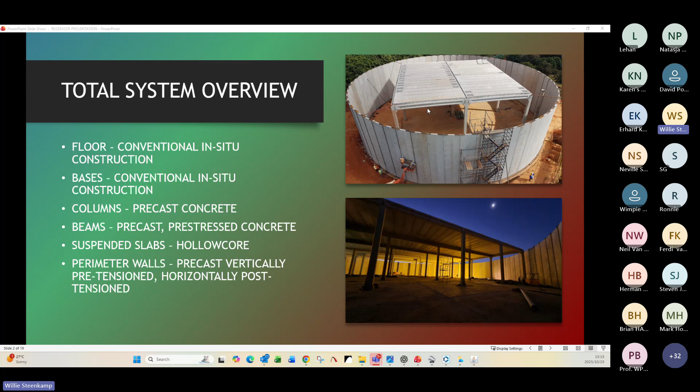Here's a couple of nice pictures just to give you an idea. You can see here at the bottom in situ cast floors, and then these are the precast columns with the corbels supporting the pre-tensioned precast I-beam sections, and the hollow core slabs.

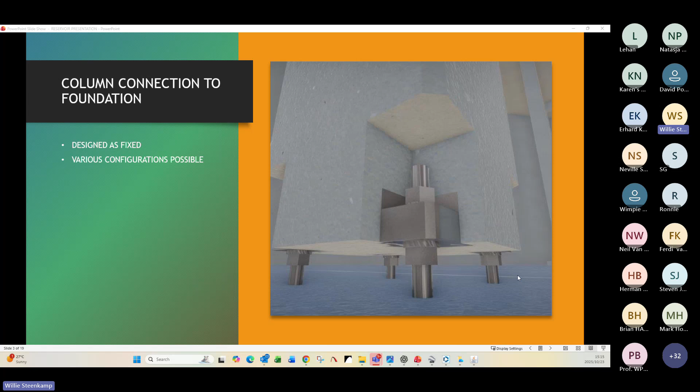Going to the connection details, precast columns to the foundation. So design is fixed, but with that, there's also various configurations possible. These are just a couple of examples that we have here, but it's more project specific depending on a couple of conditions on site. It can be an independent base and floor, where you would have a joint around your base or pad footings.

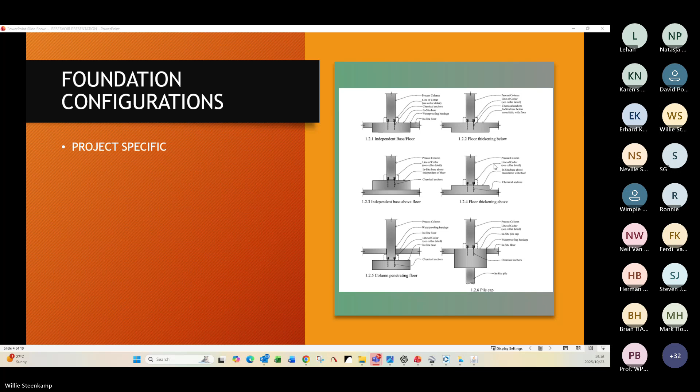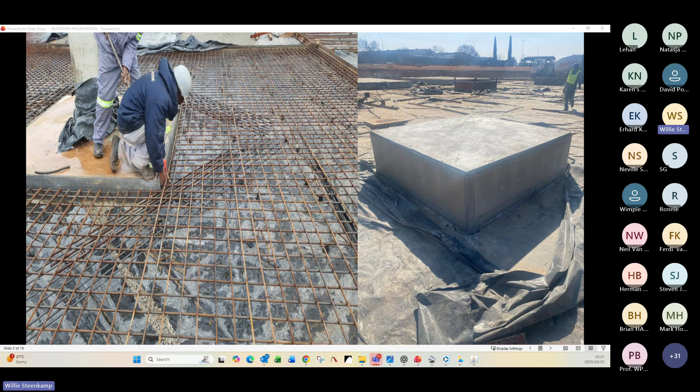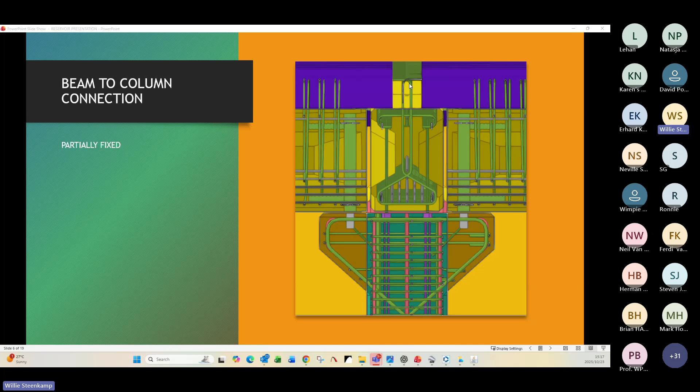Typically, 3 cores were opened off the hollow core slab. It goes about 1.2 to 1.5 meters into the slabs, closed off with some plastic bungs just so the concrete doesn't run into the hollow core slabs. And then everything is stitched together so you have a complete monolithic unit at the top.

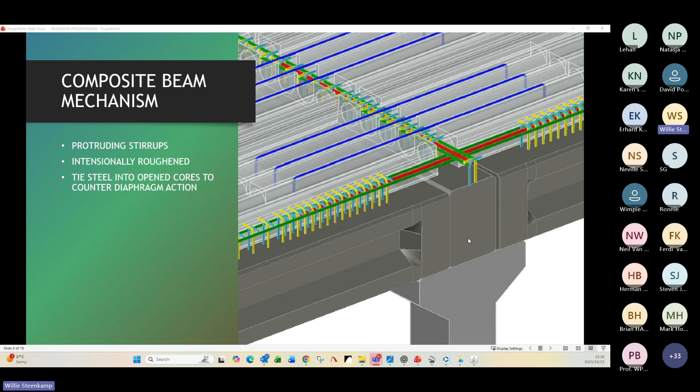Here's a nice picture of what I was describing now. Here you can see the precast beam basically at the bottom with the protruding stirrups. And here's the cores open in the hollow core slabs. This will typically have that tie steel running through these cores. And we also have some longitudinal steel along these beams, just tying everything together.

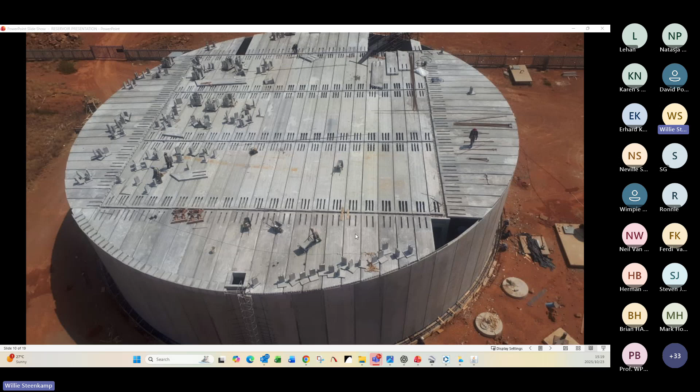Here's basically a view from the top to give you a better idea of how the complete system would look. You can see the lines there where obviously the beams are running. You have your center core portion here in the middle, which gets installed typically first, and the perimeter slabs at the later stage. And you can also see some of the coping details being stacked on the roof,

which then finishes off the edge. It's one of the finished details we do have. We also have another coping system, or another finish. It depends, as I said, on the project specifics, what finish would go there.

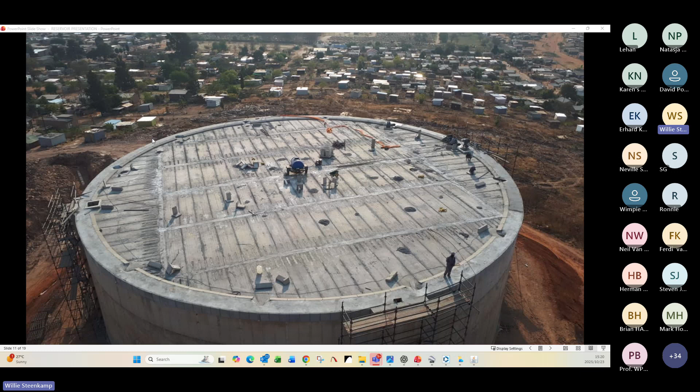Here's now where the stitching concrete is being cast and the slabs are being stitched together with those stirrups from the beams, the protruding stirrups. And you can see also along the edge, everything is now being tied together with a coping detail.

Okay, coming to the precast wall panel connection to the ring footing. You have the protruding stirrups also sticking out from the ring footing that's being cast. First, it's a 2-pour stage system. Lateral reactions are transferred through the kicker, and then the whole system is designed as a slide and a pin design, where it's sliding first stage and then pinned as a final stage when the kickers are cast.

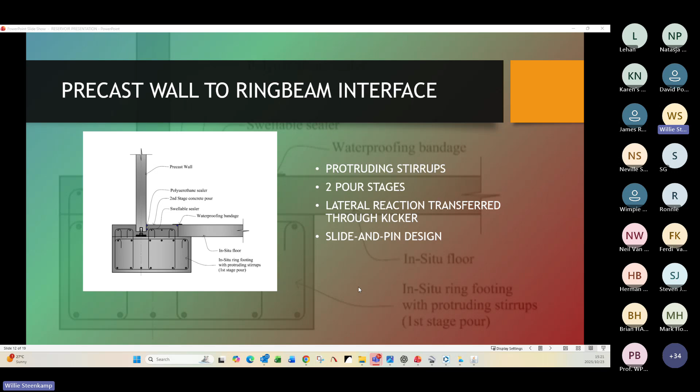Coming to the precast wall panel joint, you can see at the top right hand side a nice picture of the joint after it's been filled. And here at the bottom, it's a plan view, top view, basically of the joint. So the wall panels are connected with this typical grout joint. It's a high viscosity infill grout that gets cast into the panels.

All of the panels, and I'll see if there's a nice picture maybe later on, have between the tubes for the post-tension cables actually flow grout tubes for the grouting process that gets done at the later stage. The grout is poured prior to the post-tensioning, and it is contained along the wall panels with that temporary gasket held in position through the bolts, to simulate a watertight seal.

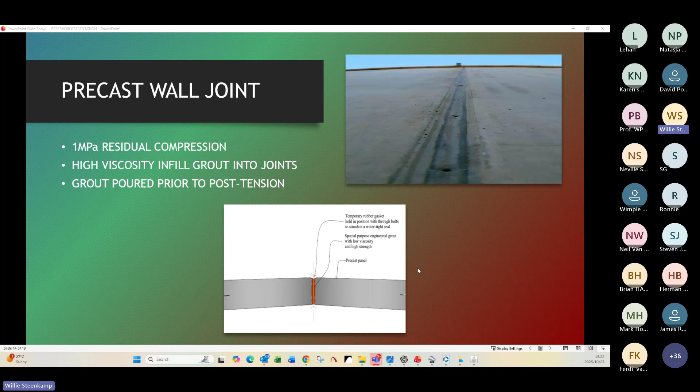I think in the next slide, we actually have the key locks. So this is basically the system being used to tie these rubber gasket systems on the inside and outside before the grouting takes place. And that key lock basically fits into a groove cast into the precast panel, which then locks into position, and that's how the rubber gaskets are then tied, fixed and sealed against the wall panel connection.

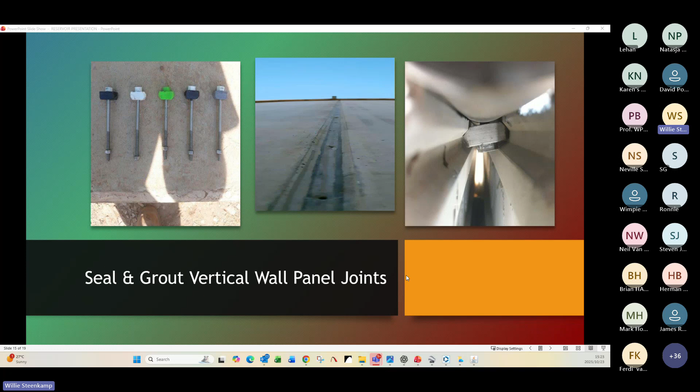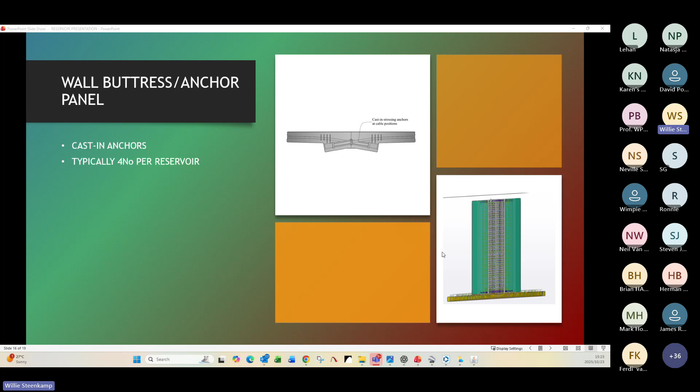Wall buttress and anchor panel. We have the cast-in anchors, and typically in a reservoir, we'll have 4 buttress panels, especially on your bigger ones, your 30, 20, and 10 megaliters. Wall stressing installation of cables. On this picture, you can see typically the buttress panel with protruding cables.

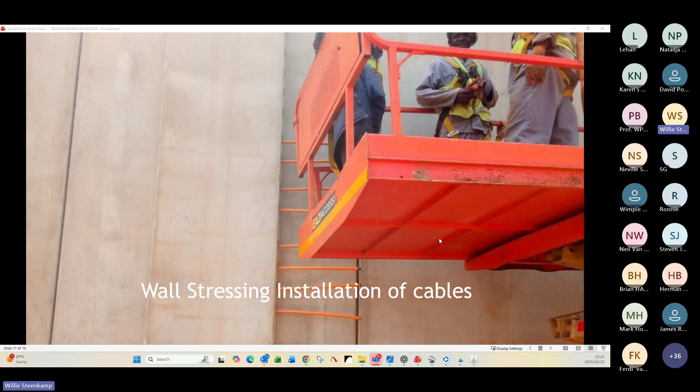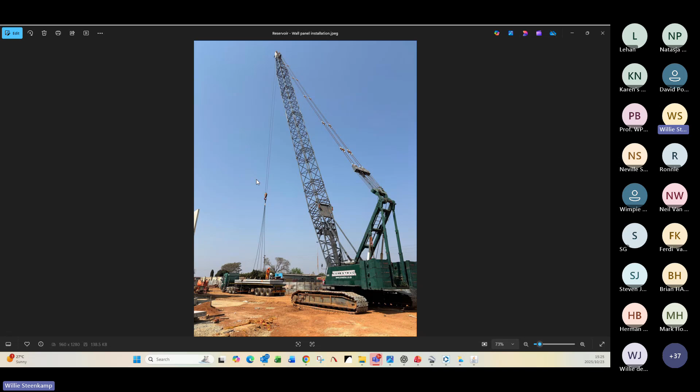Basically, that's the end of the slides, and I would like to quickly run through a couple of photos of some of our recent projects. I just want to share that. Here we have some recent photos of our currently active sites. The crane that the installation contractor Corestruck is using to lift the wall panel from the truck into position.

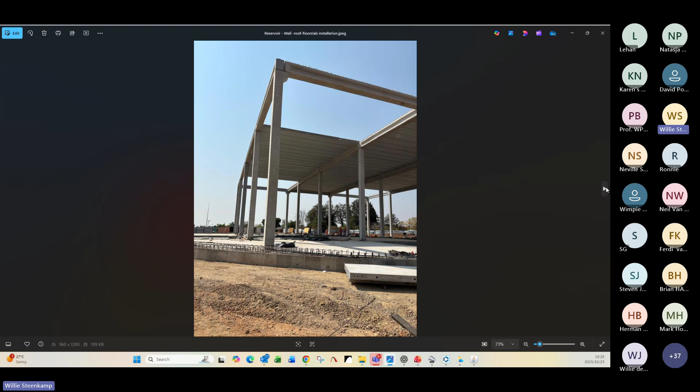And if you recall, I was discussing overlapping trades right in the beginning. Here it's one of our 20 megaliter reservoirs currently under construction. You can see the floor panels are currently being cast on site while the precast columns, beams, and center core roof slabs are being installed.

On the next photo, you can actually see in the background as well, the wall panels are also going up. And here you can see the actual alternate floor slab panels being cast.

And that's the beauty of the precast reservoir system with the overlapping trades. As you are constructing, there's actually a lot of components going up at the same time. And if perfectly planned, there's a major saving in construction time. And obviously that relates to construction cost savings.

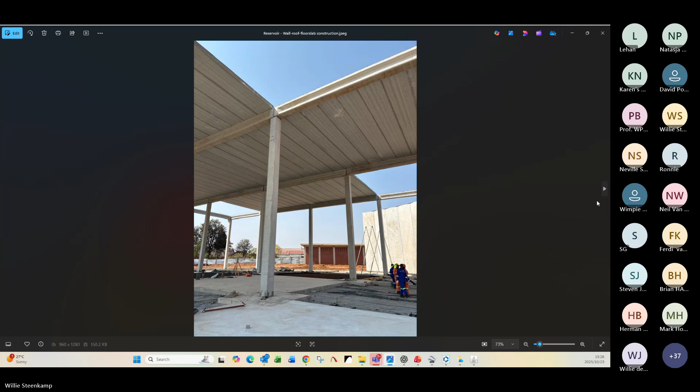Some just additional photos on that same site. Typically here under the wall, after the floor slabs, you can see the no fines. When we cast these reservoirs, the floor is shaped to drain externally to the perimeter, and no fines follows the same slope. So everything flows to the side and it goes into your subsurface drainage system.

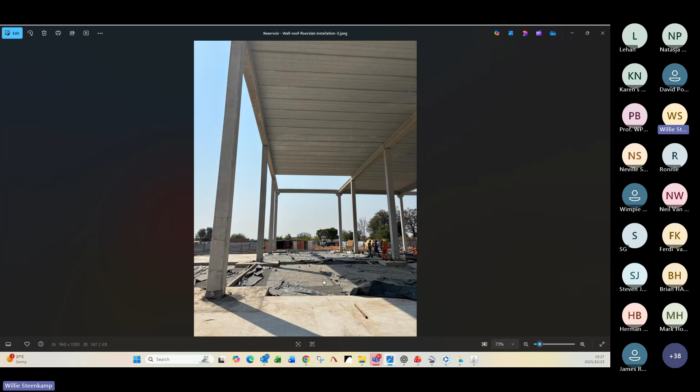Which you don't see here, and it's unfortunate I didn't get a picture while I was preparing the presentation. We also cast in the cut-off beam section. The cut-off beams below the floor slabs divide the reservoirs into quadrants for leak detection. And typically here's an external picture of one of the 10 megaliter reservoirs with all of the installations done.

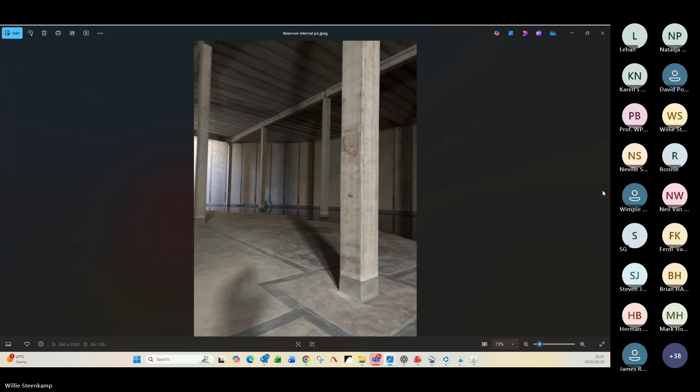And here's just one of the internal photos. Here you can see the floor slab panels already done and the CombiFlex bandage system installed. You can see it's a nice clean finish with your CombiFlex bandages. Your precast columns to base connection gets nicely sealed.

In the precast columns, we actually have the casting pockets, so the steel connection is grouted in, so it has a standard concrete cover, and we also put waterproofing over and across the complete pocket system, to completely seal off the columns, apologies, to provide sufficient cover for the water retaining system.

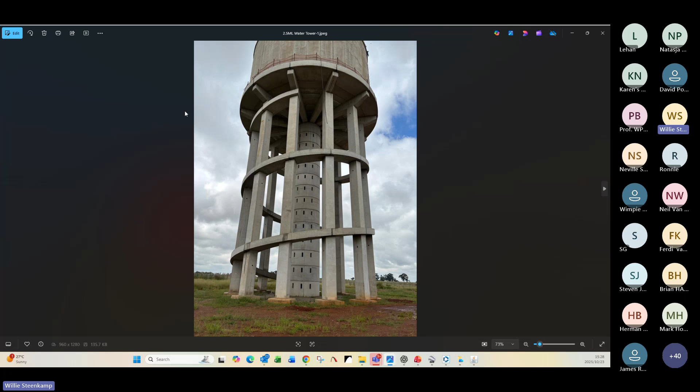Then I would just like to quickly share these photos of the water towers. This is the recent water tower we have finished at 2.5 megaliter.

But anyways, coming back to the water tower, as you can see here, the complete water tower system, it's a 2.5 megaliter tank at the top, about 40 meters high, a diameter at the top of about 18 meters, and a 10-meter high wall panel. The whole system was a precast system, apart from the in situ concrete stubs and disc at the bottom.

You'll see it was about 950 by 950 square concrete columns going up with a spiral concrete beam and a precast concrete shaft. And then you also have your precast beam elements at the top. And then similar to the reservoirs I've shown you, the water tank sits right on top of that slab, 40 meters up.